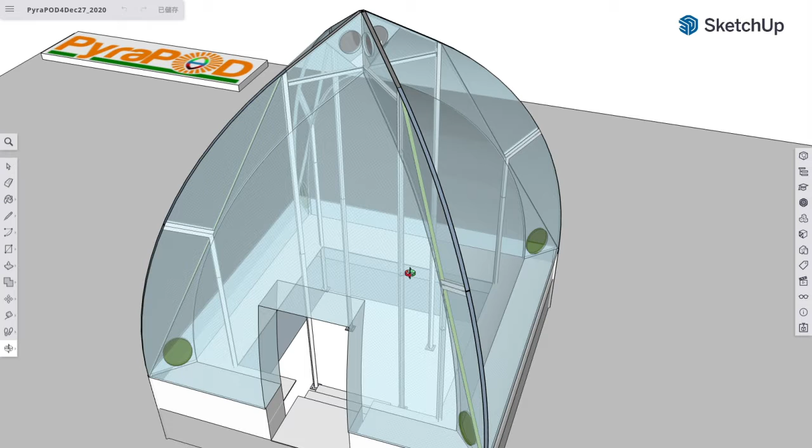We present something like this, very similar, but we made some minor changes to the top. Just show you first the top one, just closer.

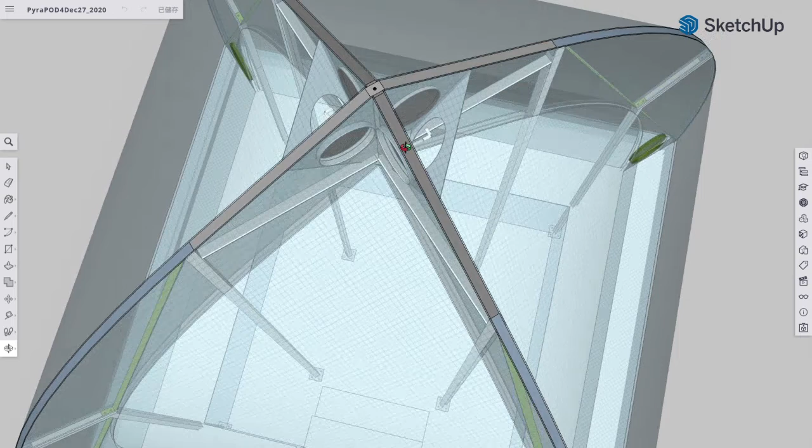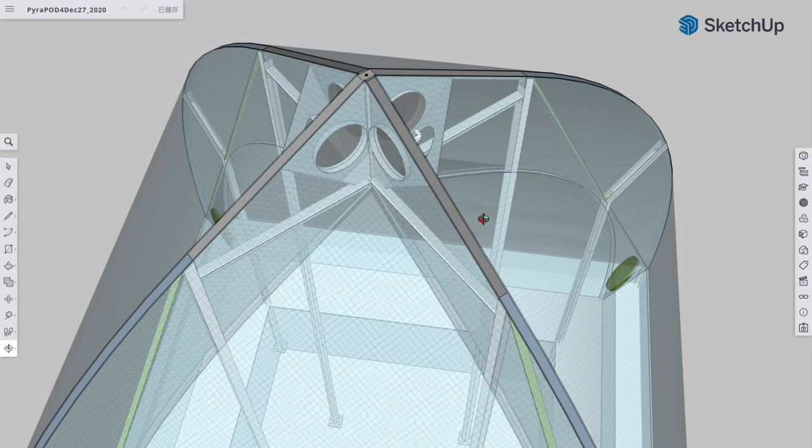What we did is instead of using a metal bar, just like those on the curve side, we use a T bar. It's stronger because later we're gonna put the lift. The lift will sit on four wheels against the tall columns, the four columns. Because of that, we need some strength, so instead of using a flat metal bar, we change it to a T bar.

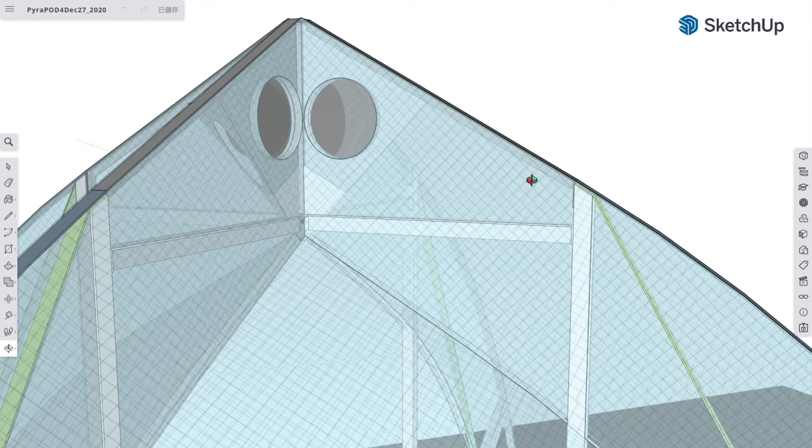Probably hard to see, but it's a T. You can see the vertical part, so you cut this way and cut this way, and the rest is similar here, and it's bent this way. You just cut away the vertical part, and then you bend it just like the flat metal bar.

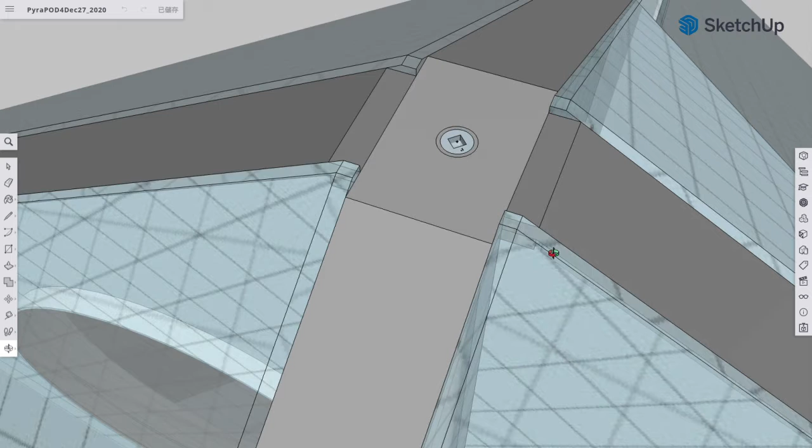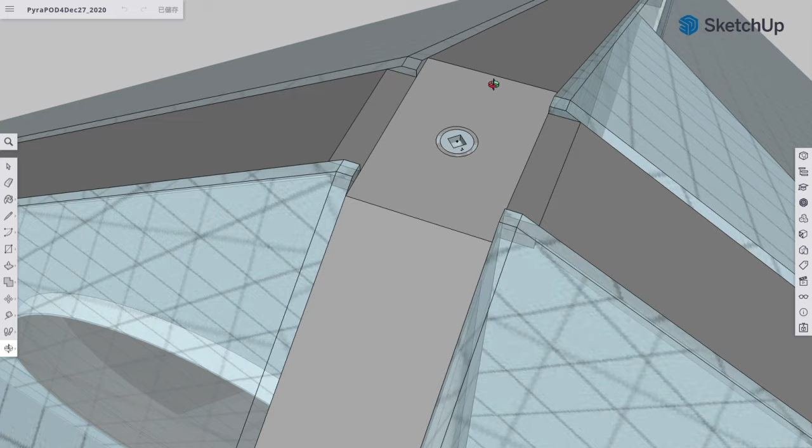That's for the side. The top is different because we have a T. So this time, basically we make the T bar for the top for this. There's basically two cross pieces, one going this way, one going this way, but the top piece is continuous. You simply cut the vertical part at the bottom, cut it away so it is flat, and then drill a hole.

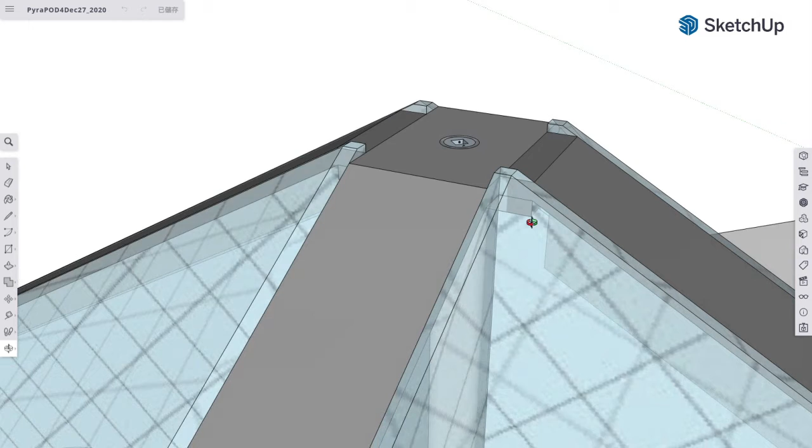But for the next one going below, because the two have to be flush, we simply cut here and cut there, and then use another piece at the bottom. It's a full piece, and then weld this part together, weld that part together.

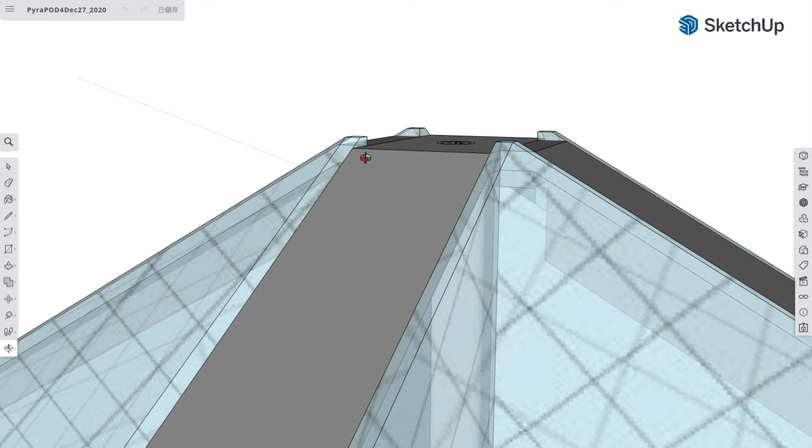So this way the pyramid bar below is actually also continuous. There's just a groove here so that this one can simply sit on it.

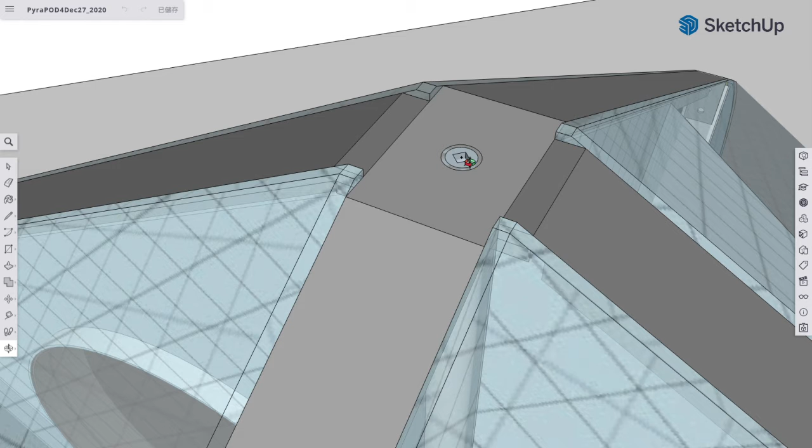So in order to show this clearly, we remove the exterior covering so you can see. This is actually simply the inner bar. And then we drill holes, and also we change the...

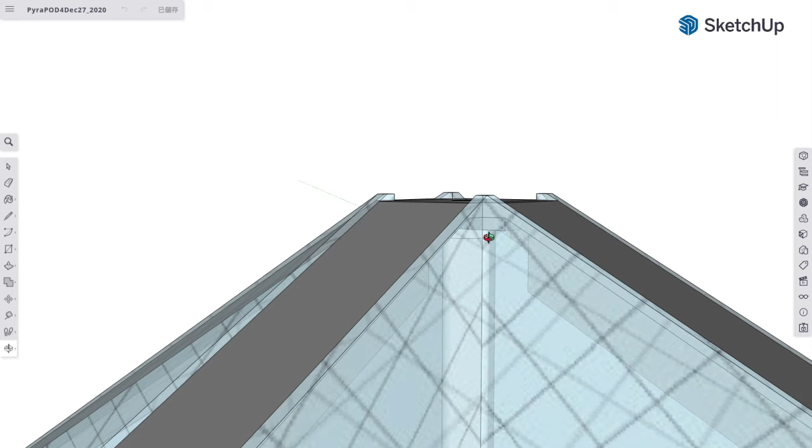...square hollow column, the small columns here, into a rounded metal bar. We weld another piece, a round piece at the top to close it, and then make a threaded hole so that this threaded bolt can simply be used to hold everything together.

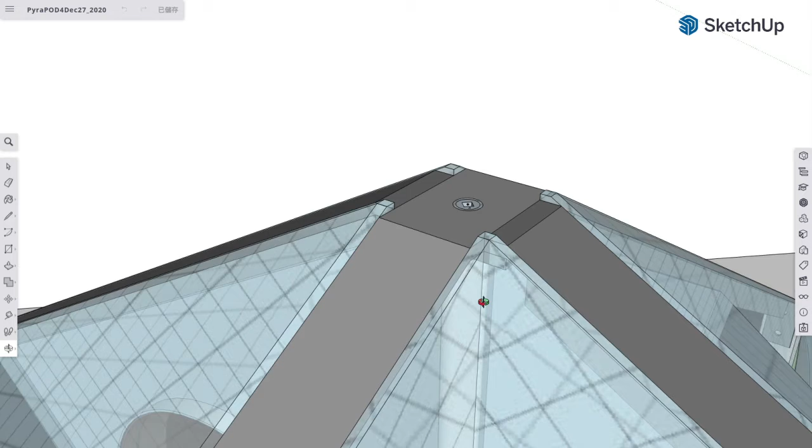So that's that, and then you cover everything with an exterior cover, and that's finished. So that's that.

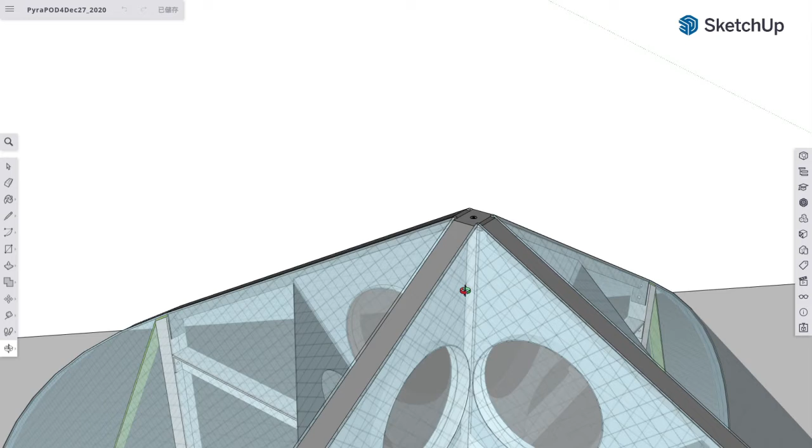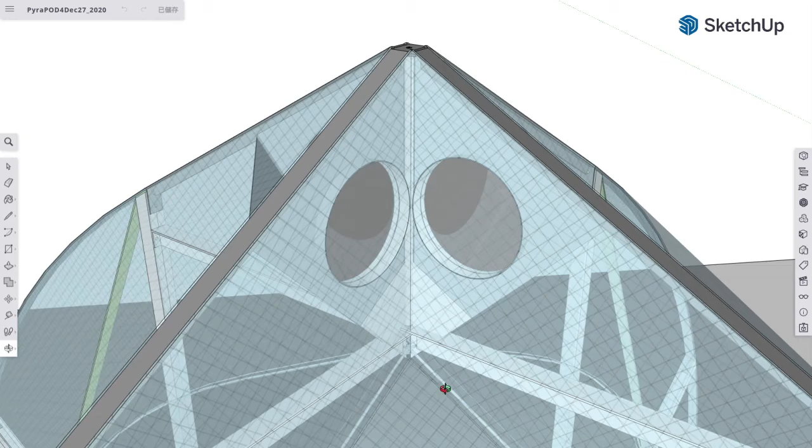Just to make it stronger, for the four horizontal bars, horizontal beams, we use similar material, also a T. The connection is similar to the top, but the small difference is this one simply sits onto another, because of the cover it's hard to see, but here we see it slightly clearer.

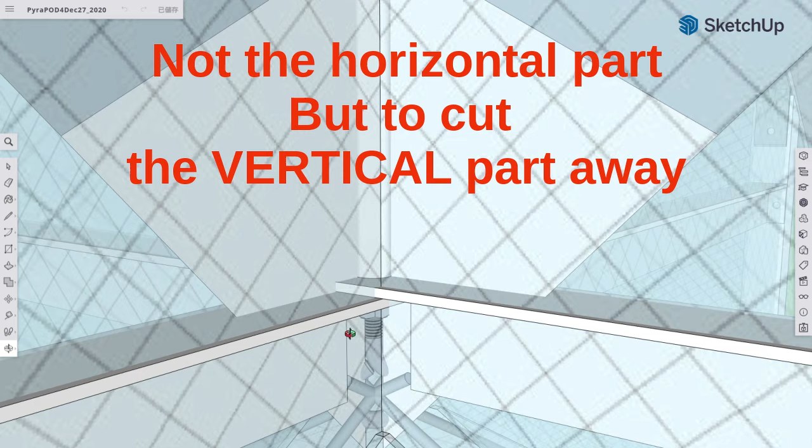This one simply sits on top of the other. Obviously you still need to cut away the vertical part for this section, and then also we use this kind of bolt, a bolt with the eye. You see, like this. Some of it's blocked by the bubble generator, but anyway, you can see it's this way.

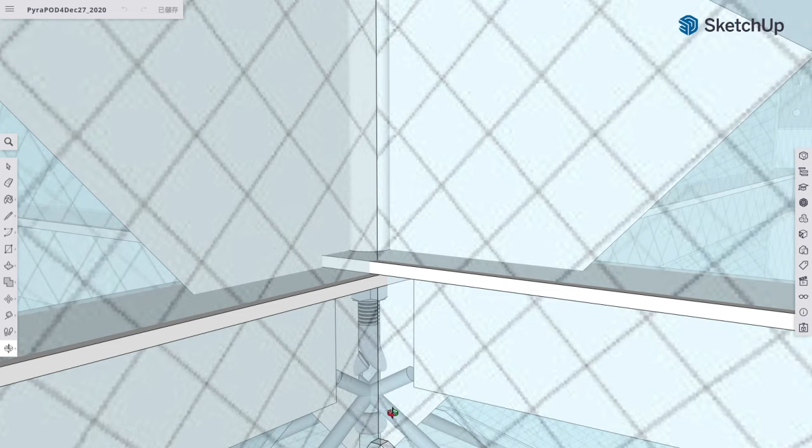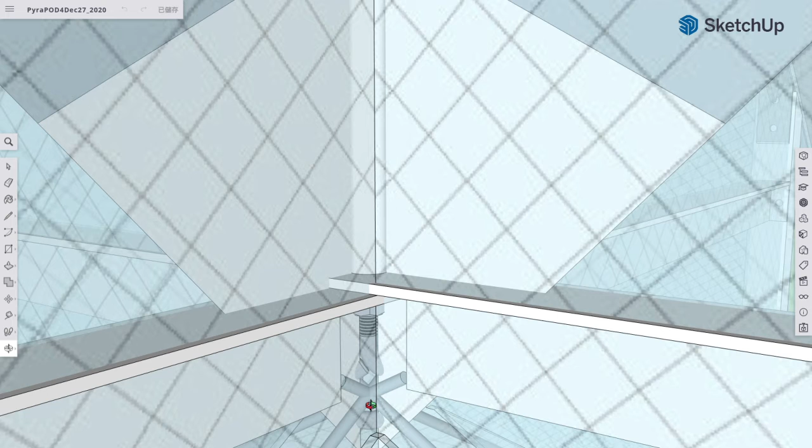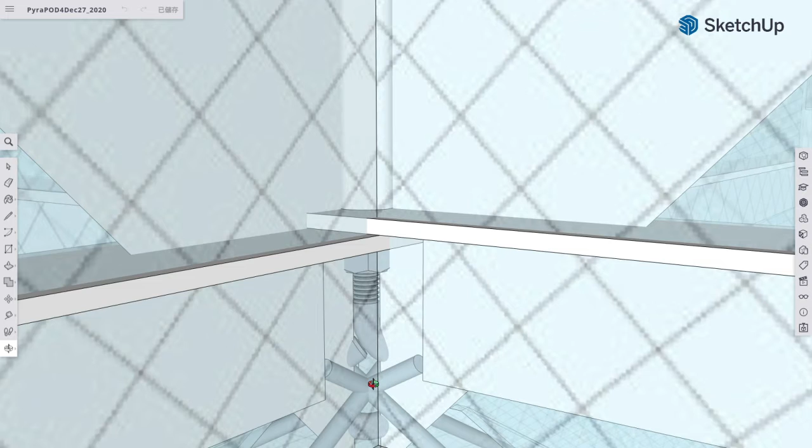So we did that so that the four ropes coming from the lower section of the panel at the back, we use ropes to stretch, to tie to this eye bolt, so that it's tight. This mechanism also allows us to turn it, to tighten things up. Anyway, this is something we did.

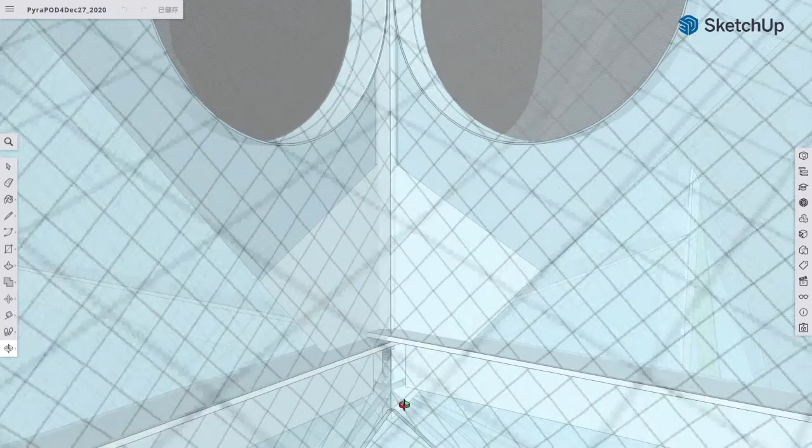So this way, very simple, fewer parts. The point is to make it easy to assemble, and have fewer parts to work with. That's something we'd like to show you. This is if you decide to do it yourself rather than waiting for mass production, you can do it just simply according to this design, and the rest is the same.

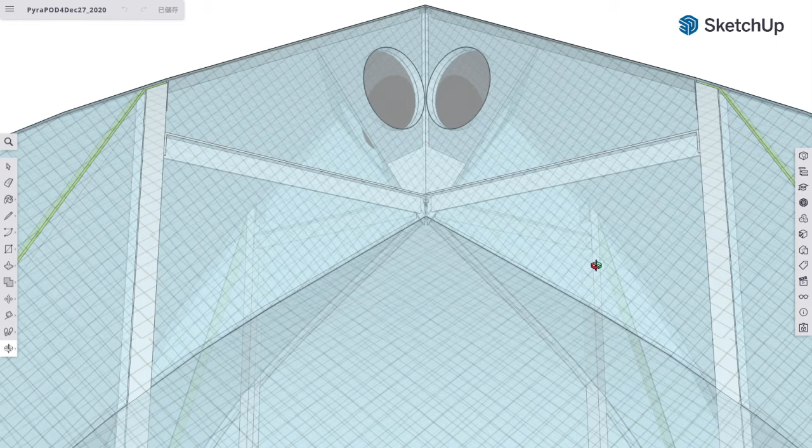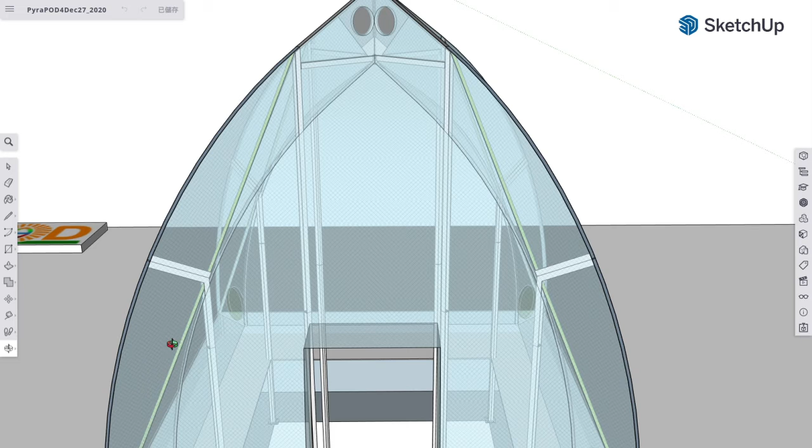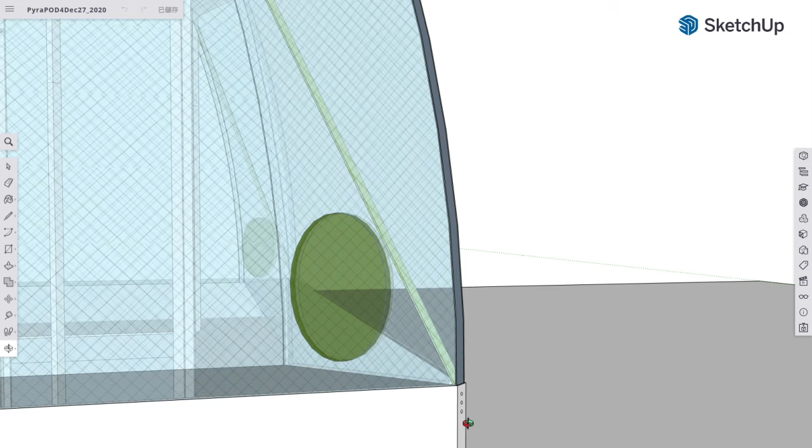See here how it's attached to the vertical column, and this vertical column is the same, it's a U channel. Nothing else. The same here, and same here. We already mentioned that we use the same U channel. The U channel opening faces inside, the closing side faces out, so it looks nice. We use both to tie everything together.

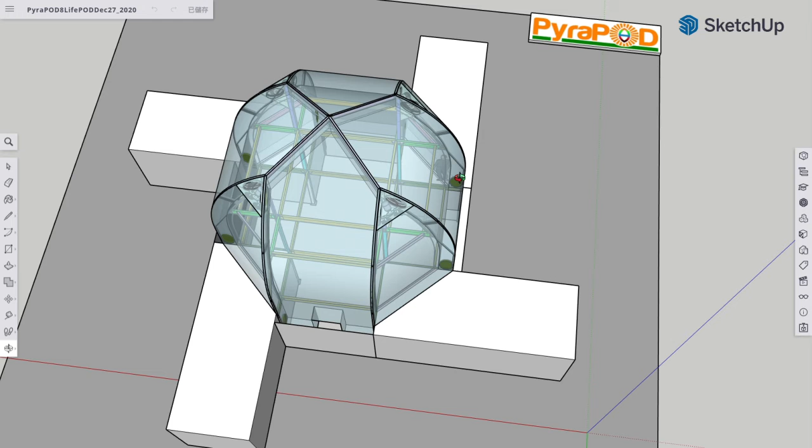Okay, welcome back to PyraPOD8. As you can see, this is PyraPOD8. By 8 we mean we move the 4 quad panels away, pull them away, so that 4 actual edges form along the perimeter of the structure. That's PyraPOD8.

This video is just to show you that by inserting a cube structure like this, whether it's rectangular or square footing, we simply insert a cube structure to the corner, underneath the quad panel. We call this the X panel, and we insert this below the quad panel. Then we can create a complex...

...combining human living in the cubes with vegetable growing in the center, above. This way we can have both the human living spaces at the corners, and also the vegetable growing in the center. This way you get both. So this is simply a rough design to show you it can easily be done.

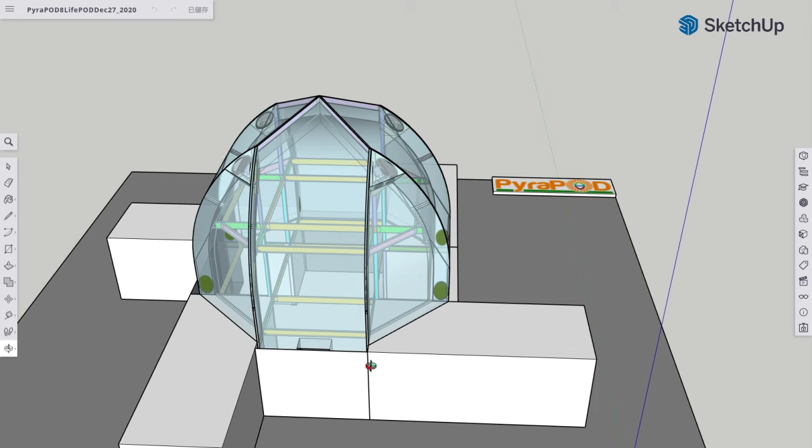This one we just simply drew in. This obviously needs a door. So for this type of structure, you can insulate, have this knee wall. We just simply call this a knee wall. Insulate all the knee walls, even here. I'm talking about moving this away, let me see whether I can move it away.

Move this away, and see, you can insulate this wall, and also this wall. That way you don't even need to have this here, and you can still have a structure which is sound and fully insulated.

This could be a shipping container, or just a portable mini house. If you want to move from Europe to Canada, you can simply insert your stuff here, your cube here, and make the connection for power, water, and electricity. Then you can join this community.

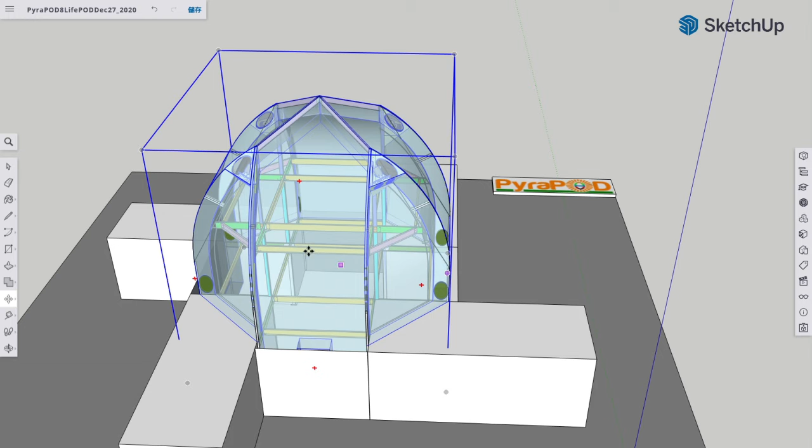So that you have a central location for vegetable growing, even fish growing, but you keep all your personal belongings inside. Once you decide to move to another place, you can simply remove it, simply pull it away. It's very easy to do.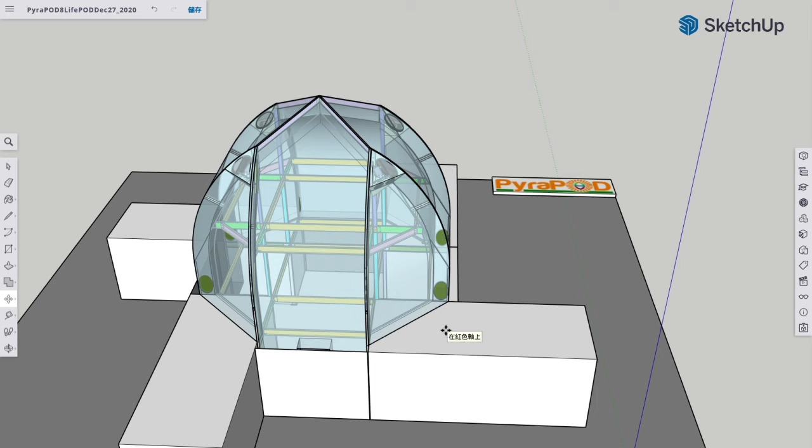So this is nice, let's put it back. Just so that's that.

This shows you can do a lot of things once you have this transparent structure, we call it PyraPOD8, and then you can do a lot. For those who don't understand why we build these greenhouses this way, I'll quickly explain.

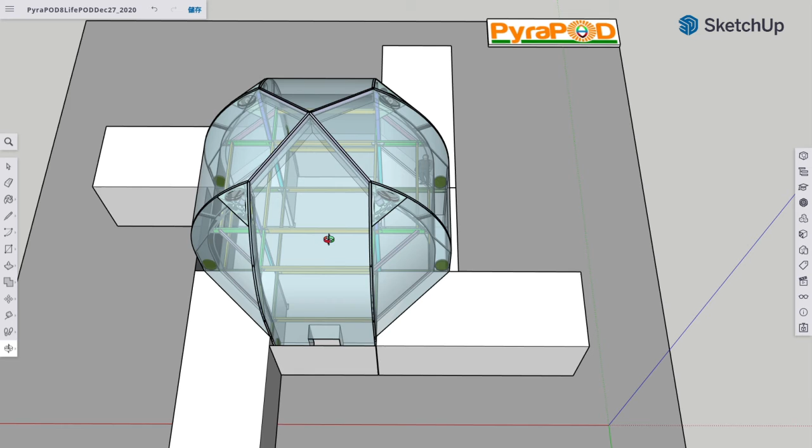As you can see, what we have is a double layer structure. This is the exterior covering, and this line shows the inner fabric, the inner covering, but the inner covering has 8 sections. So this we call the X panel, this we call the quad panel, and each panel is actually a bag.

For the covering, it's tent-like, but it's a tent with double covering, and each panel has a cavity, like a bag structure. When you put the cover on, the bag also drops into place, and then we use ropes to tie everything together to make it tight, stretched.

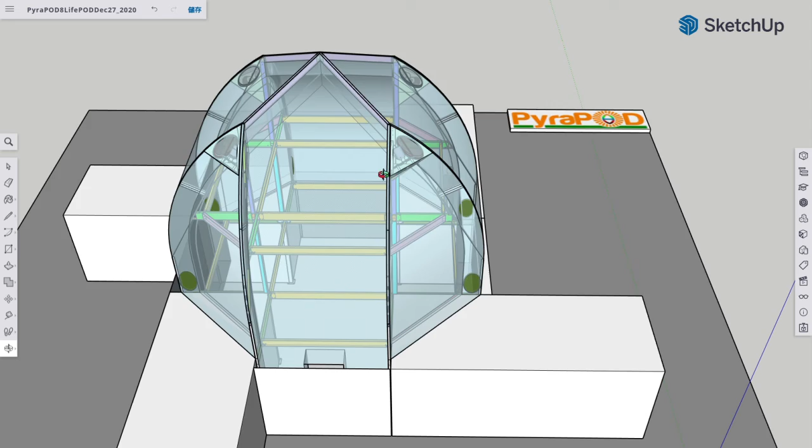Then we simply use soap, this we call a bubble generator. There's a fan here that blows air in, and two sprayers that spray soap liquid onto two screens. The fan draws air in, creates positive pressure inside, and forces the air out through the screen, and this way we can blow bubbles.

The bubbles shoot into this direction, and this direction too, filling the top, then coming down, and the air pushes the bubbles into this section until they accumulate to a point where they get sucked through the fan. So we have this circulation of bubbles.

That's the idea. So with soap liquid, bubbles fill the cavity, basically insulating the entire double layer cavity, and then you can create a very well insulated structure in the wintertime.

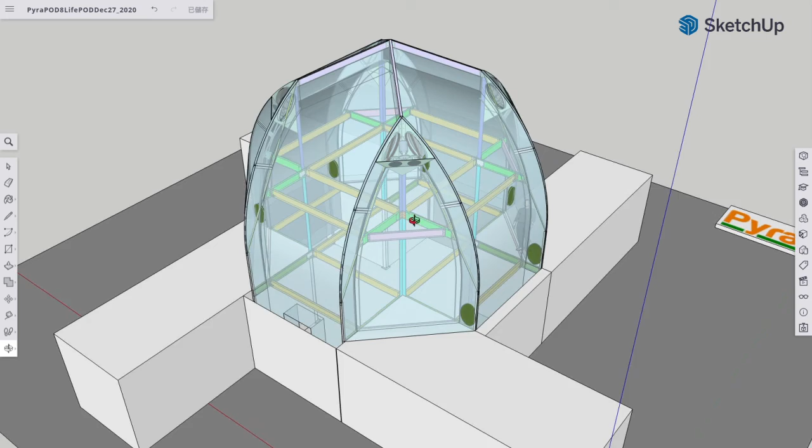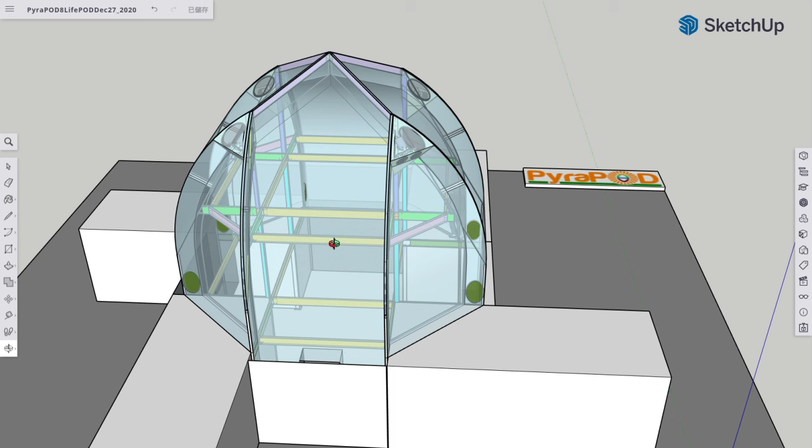So to keep the thermal energy inside. For summertime, you could also use that bubble layer to form a shade to protect the plants, especially facing south. And even if you want total transparency, you can still collect solar thermal energy without using the fan, simply by spraying, and then a liquid film forms that continues to absorb the solar thermal energy. That's the idea.

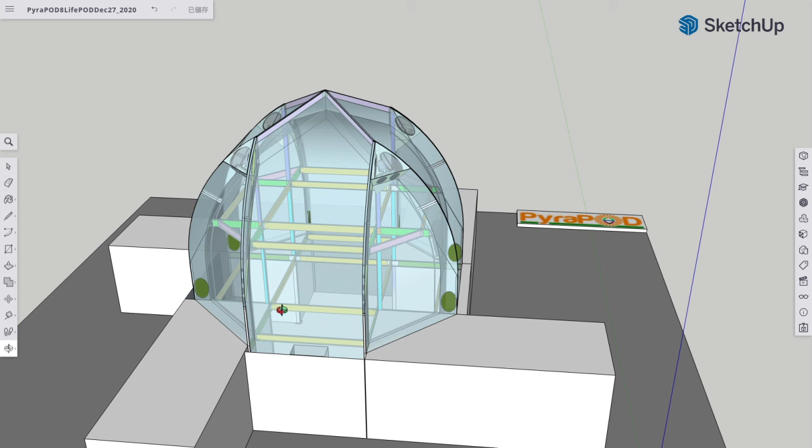This simply shows that besides building this innovative closed eco environment, this type of greenhouse, you can also easily integrate existing living cubes at the four corners. This way you have a complex, you can call it a life pod, because you have a living space, and also a vegetable growing space, and you can also do aquaponics because this is closed.

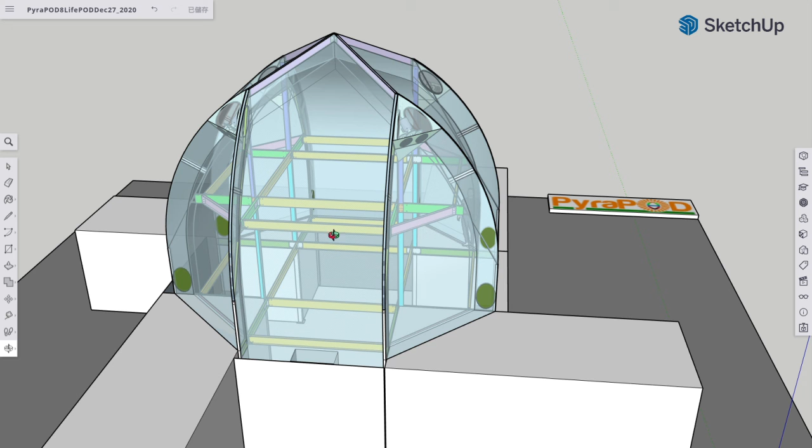This is a sealed growing environment, so everything is in perfect condition. You don't need ventilation because you can keep the temperature low in summertime using these bubbles, thermal energy, and soap liquid to cool it, to absorb the solar thermal energy and transfer the heat from the bubbles into the liquid.

There will be a liquid storage tank on the ground level. So this is the idea, you basically have the solar thermal energy and the geothermal energy. In this case, geothermal simply means the water storage on the ground level, or it could even be buried in the ground. This way you have the heat source, and also the heat sink, which is the stored water.

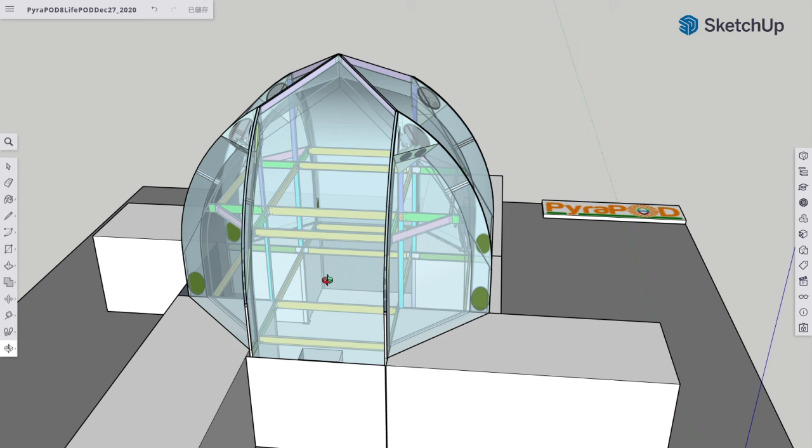This way you can easily maintain comfortable temperature and humidity inside, and also keep the carbon dioxide inside too, so that your vegetables grow better. That's the idea.

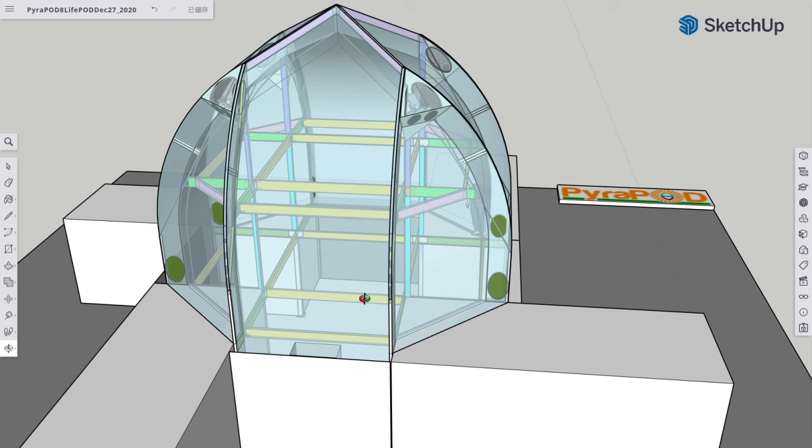Hope you like it, and we'll modify and improve this design. This simply shows what you can do with a structure like this. You can simply combine both the vegetable growing area and the human living area, so the two match perfectly. Okay, see you next time.